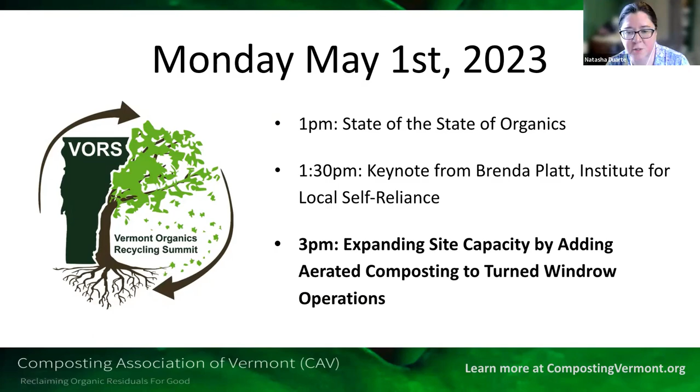With that, I'm going to stop sharing my screen and invite Brian Jerose to start sharing his screen while I introduce our speakers. We're joined today by Brian Jerose, who's been president of Agrilab Technologies, Inc. since 2012. AGT sells compost, aeration, and heat recovery units and other farm and composting equipment. Brian and his team also provide planning, design, development, implementation, and ongoing operating support to farm, municipal, commercial, and nonprofit clients in Vermont and several other states and countries. He's worked on a range of composting, watershed protection, and sustainable development projects, and he lives in Fairfield, Vermont.

Robert Spencer is going to be joining Brian. He's been the executive director of the Windham Solid Waste District since 2011. Windham Solid Waste Management District serves 19 member towns in southeastern Vermont and operates a transfer station, composting, recycling, household hazardous waste, and education programs on a Brattleboro property that includes a closed landfill covered by a solar array. Bob is also an environmental planning consultant who works with composting facilities and other clients in Massachusetts and around the country. He has operated several composting facilities and is also contributing editor for BioCycle, and he lives in Vernon, Vermont.

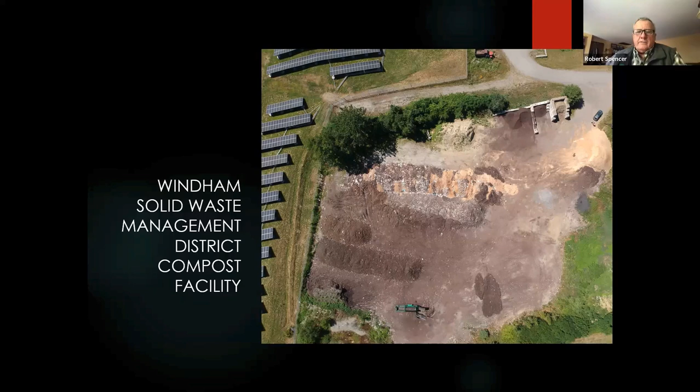Yes, we do have a significant demand for our product. We take mixed residential organics. This is from the town of Brattleboro.

For 10 years, they've offered curbside food scrap collection. The way the program operates is they have every other week trash collection, weekly food scraps, and weekly recycling.

They also have pay by the bag, or pay as you throw. So every other week collection increased the number of participants, and pay as you throw increases participation too. So we're up to over 600 tons per year of that mixture you see.

You can note the substantial amount of cardboard and paper products. We are about diversion as a solid waste authority.

We don't try to have certified organic compost, which would bounce a lot of these materials out. And we reduce the amount of carbon that we have to add due to the presence of the other fiber.

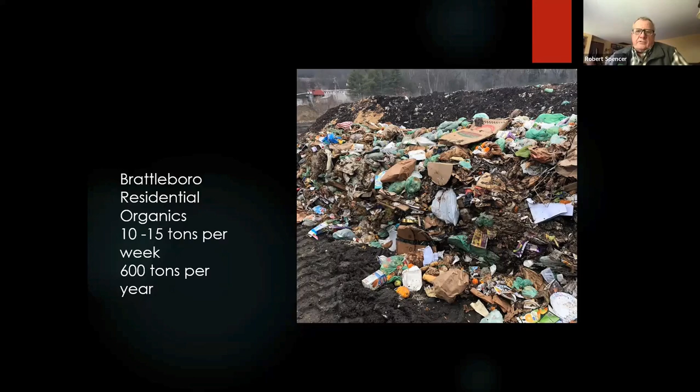The leaves that we get from the town of Brattleboro, there really aren't enough to sustain our carbon needs. There's only 2 collections curbside in Brattleboro, 2 weeks in the spring, 2 weeks in the fall.

So we have to go outside of the region to get more carbon, as I mentioned. Next, we have a number of commercial food manufacturing businesses that bring material to us.

One of them is a gluten-free bread company called Against the Grain, and they have been expanding exponentially over the last 5 years. And one of the ingredients in their mixture is eggs.

And they have a machine that extracts the contents of each egg to use in their recipes, and we get their eggshells.

Those are in biodegradable polymer bags, but we get literally millions of eggshells, and 2 compactor loads per week.

Occasionally we have off-spec bread and pizza shells, but I wanted to point out the eggshells because it's actually a slow release nutrient source for our compost.

And there's little white flakes in the finished product. And fortunately, it's predominantly not plastic.

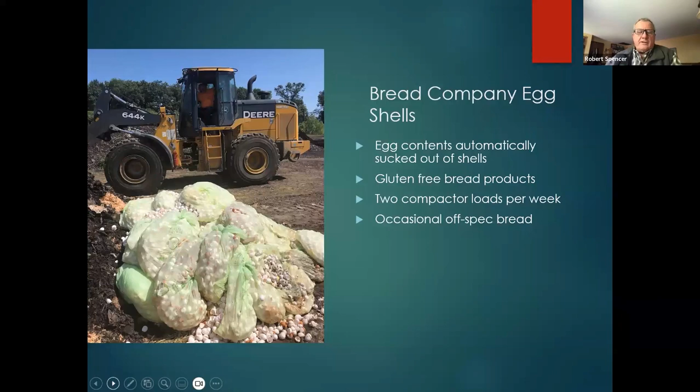Next. So this project is really centered around state regulations. And in Vermont, we have a very expedited program for starting as a small food waste composting facility.

Basically, it's a permit by rule, or registration process, where you can process up to 2,000 cubic yards per year of food waste, up to 3,000 cubic yards of yard waste. Total permitted capacity is 5,000 cubic yards.

We have a separate approval to take soiled paper and cardboard, which, as I mentioned, is a good carbon source. We have a very low-tech operation using turned windrows with a loader.

We have a large 5 cubic yard John Deere 644K that mixes the material and turns the piles. We have a smaller John Deere backhoe with a 1.5 cubic yard bucket that we use to load our trommel screen.

So we have really 3 pieces of equipment that we use primarily. We comply with the regulatory monitoring and document our pathogen kill temperatures as well as compost product testing.

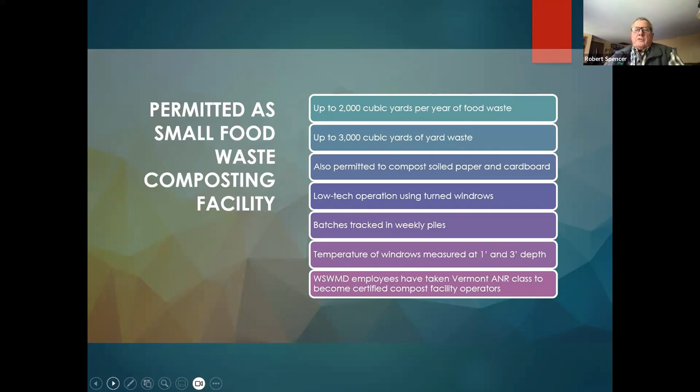And our employees have all been through the Vermont operator certification for compost facilities. Mentioned the Brattleboro curbside program.

It actually started in 2013, and as you can see, it's grown over the last several years, and we'll probably hit 700 tons this year.

We had a slight dip. We didn't accelerate as much in 2021, partly due to COVID, as was mentioned in the opening session, closures of schools, etc.

Called Vermont Bread Company. And that was a significant loss to our

feedstocks. We also proactively notified the Vermont DEC that we were exceeding our cubic yards.

The regulation is written in cubic yards. We weigh every vehicle, and so our records are in tons.

We spent, 2 years ago now, when we realized we were knocking on the door of our permit, a couple of months documenting every load that came in and estimating the percentage that was paper and cardboard versus food scraps.

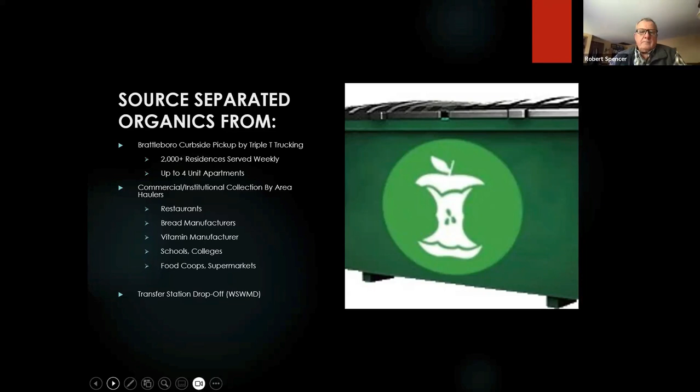Apartments above 4 units are considered commercial generators and are not served by the town of Brattleboro's program. Brattleboro operates the curbside collection with a private company, Triple T Trucking, which is now Casella Waste as of last month. In addition to the residential program, we have numerous restaurants, the bread manufacturers I mentioned, a vitamin manufacturer, schools, colleges, and supermarkets, food co-ops. Our transfer station also has a drop-off for residential food scraps, and several other transfer stations in our district send materials to our facility. So it's a wide range of institutional, commercial, and residential materials.

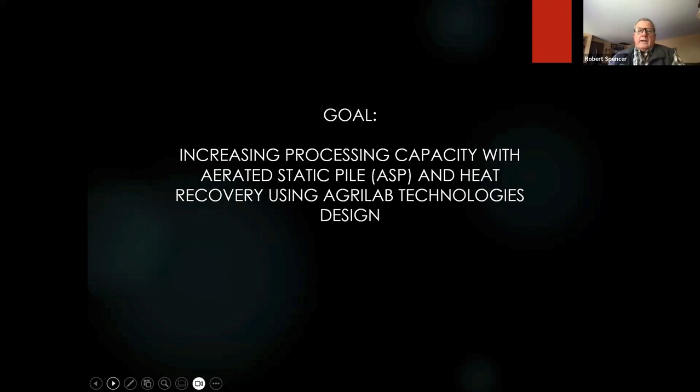Our overall goal is to increase capacity. We're hoping to do it, though we haven't built it yet, with aerated static pile and also heat recovery, which you'll hear more about. We needed some sort of accelerated process because of a relatively small footprint that I showed at the beginning—approximately 2.5 acres of active land use area for composting. It's on a 35-acre site the district owns, but 25 of that is closed landfill.

We also have a transfer station and a closed MRF building still used to bale cardboard, so the facility is quite busy. We needed a faster cycle time from when materials come in until they go out—it's anywhere from 6 months to a year right now, and we need to decrease that time to increase our throughput. We also wanted to use the aeration system in conjunction with turned windrow, and we'll show you how that design is set up, plus heat recovery. We needed a reasonable budget, which I'll talk about along with the financing, all while staying in compliance with Vermont ANR regulations.

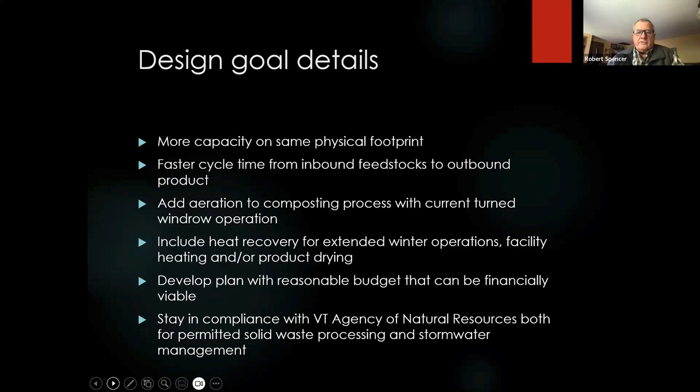So Brian, why don't you describe the system we're anticipating using? Just so everyone knows, we will be putting this project out to bid, and we have not selected Agrilab, but they have been part of our initial design. We retained them for initial design services, and they will be bidding on the project, though we're not sure how many other companies might bid—there are a couple others.

So just a quick review of what compost aeration and heat recovery is. Most folks are familiar with turned windrows, where loaders or other equipment flip and agitate the piles, both to mix the different feedstocks and particles and to get oxygen in. Forced aeration, or aerated static piles, involves setting up piping networks in or below the compost piles to push or pull more oxygen into the material. Since it's an aerobic process that wants oxygen to speed it up, rather than the 1 or 2 times a week that a typical turned windrow gets oxygen through turning, an aeration system can introduce oxygen 10 or 12 times a day, depending on the timer schedule.

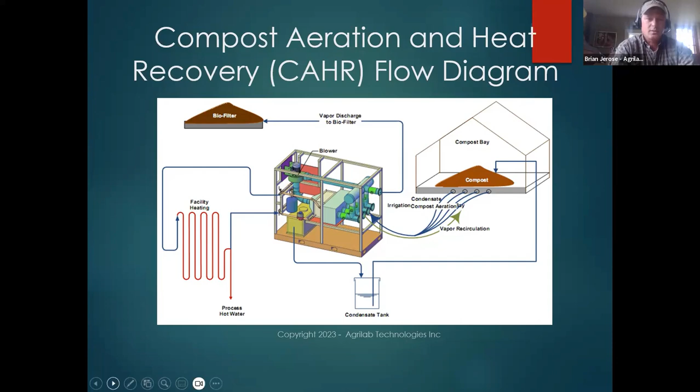We've, over the last few years, built up a good list of projects where we've implemented this compost aeration and heat recovery process. Right next to Brattleboro is a livestock and dairy farm in Vermont that Jeff Dunkley and family operate. They have a pretty simple unit that more or less sucks the tailpipe exhaust out of a rotary drum composter that they use with separated dairy manure solids.

Larger installations in hybrid farm and commercial situations include Foster Brothers Farms, the Vermont Natural Ag Products folks who make Moodoo—some of the shots I'll show later are from that site—Tamarlane Farm up in Lyndon, which some folks mentioned, and then several others around New England and all the way out to Michigan. Bob's had the benefit of being able to see at least a couple of these sites, 3 of them I believe, so that informed his team's decision to pursue this type of approach for their facility.

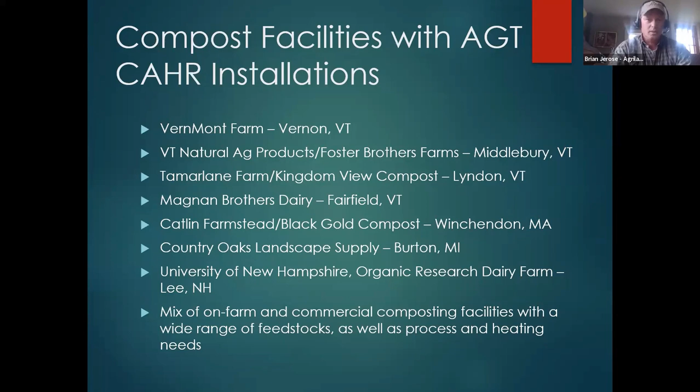This process isn't limited to dairy and livestock farms, even though our first sites were. We've been able to work with a wide range of feedstocks. The Vermont Natural Ag Products, for example, in Middlebury probably takes in a dozen different types of feedstocks. And some of the other commercial sites out in Michigan are primarily leaves and wood chips, food scraps, and such. So this technology works with a range of compost inputs and is adapted to what the site actually needs.

These next few slides are focused on just helping people visualize how these systems are actually put together. So these first few shots are kind of the construction stage, and then a couple shots that will end with what it looks like when it's operating.

To point out, some of the early heat recovery projects off of composting involve physically putting irrigation or other tubing in a compost pile. While that was a great innovative way to take advantage of it, known as the Jean Pain method, it can work well for a homestead or do-it-yourself operation. It's not very practical in a commercial or larger scale operation to have all that piping or tubing in your compost, and it's not even the most effective way to gather the energy.

So these systems involve setting up either the pipes on grade under the piles, or you can build trenches. This is pretty similar to what's proposed at the Windham site.

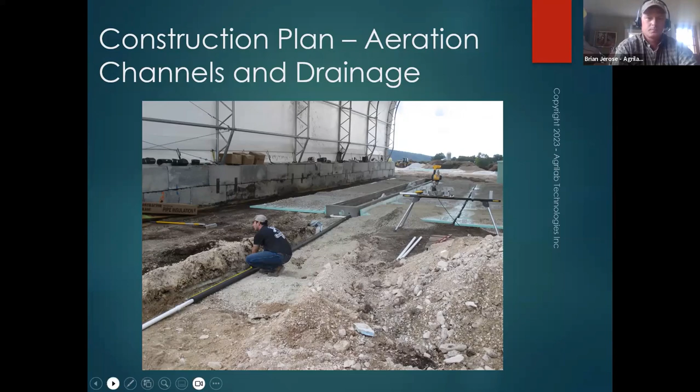Looking out on the pad, I wanted to call out that because we're also trying to do heat recovery beyond just putting these trenches into the working pad where we'll pull and push the aeration, it also maintains the temperatures to the best of our ability. So when that vapor is drawn into the heat exchange unit, it's at the highest temperature possible.

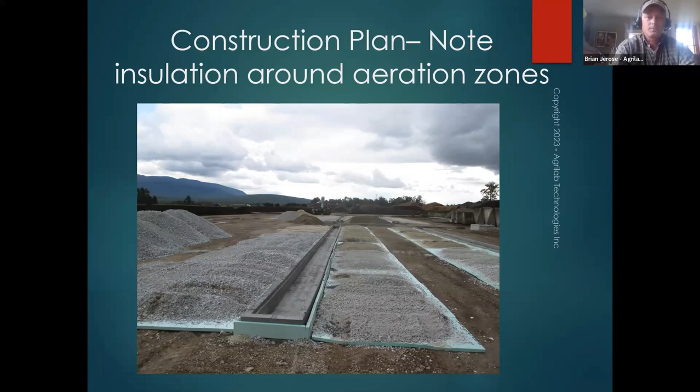One of the other things that happens with negative aeration, and is less of a concern with positive aeration, is the accumulation of condensate. Picture 150 degree vapor, high humidity. Anytime that vapor hits a cooler surface, like a pipe wall or any point along the path, it starts condensing and phase changing into liquid. If you don't have a good means to drain that out, you can create a blockage and interfere with effective aeration. So over time we developed different sump systems.

In this case, here's a septic style tank where the pipes go in. There's an extended trap, kind of a bigger version of what you see under your sink, and that allows the water to drain out without the suction of the fans pulling it from the compost pile instead. Interestingly, most of the water we see is condensate, not leachate. There's occasionally the rare circumstance where there's so much moisture going through the pile that you do have nutrients that need to be treated.

But oftentimes the mass of compost, even in an outdoor pad, is enough to absorb snow and rain melt. We do have this set up so that if you do have leachate, it's properly handled and sent to either a retention pond or an appropriate filtration area.

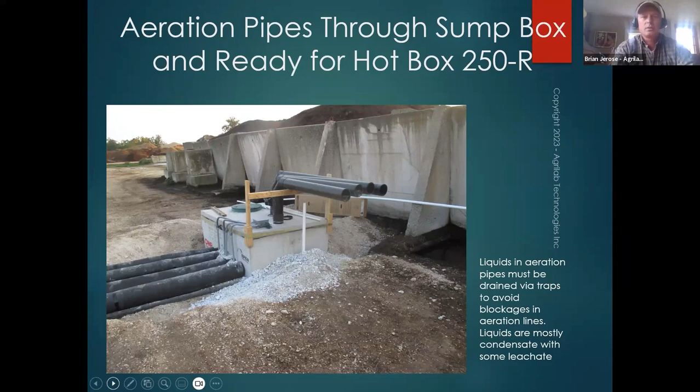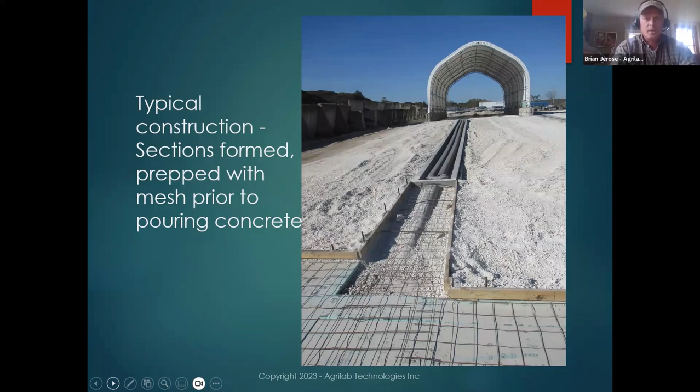A little more of a view of a pad coming together. You can see the sub-base material, the trench being filled up to it, and then in certain areas where it's more shallow to the surface, you want to protect the pipes, so concrete may be placed over those sections.

You can see the material being brought up to grade. Over to the left is the compost aeration and heat recovery unit, so all the mechanical equipment, the blowers, heat exchanger, sensors, etc. are in there. That's where the pipes connect from under the piles, run underground, go through the sump, and those circles are the pipe ports where it's connected. We build this equipment up in our shop in Cambridge, Vermont, off of Route 15, Lamoille County, and then deliver these to various sites as much of a plug and play equipment as possible.

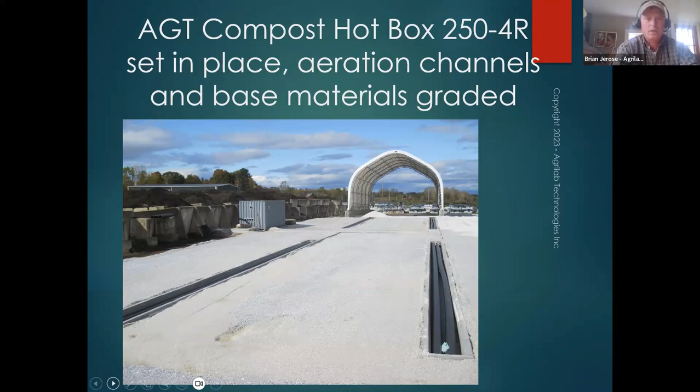Here we've got the final surface, in this case asphalt. I'd say the majority of sites use concrete or gravel as a surface, but in this case asphalt was most cost effective and has held up well. This pad has been in place since 2017 and is not showing any excessive wear or degradation.

One interesting thing I'll also call out is there are certainly a lot of systems, and we've made them as well, with cover plates, but as long as your process allows equipment to straddle and go in and out, placing these coarse, clean wood chips around the pipes has been an effective way to build a plenum and avoid clogging. By coarse, clean wood chips, I mean not a lot of fines or sawdust, so it's kind of loose, but still enough of an effective filter.

So wet manure or other wet compost particles are captured there and don't clog up the perforations in the pipe. Periodically it needs to be checked - you can have it get compacted or plugged at times and it needs to be raked off. Since it's wood chips, they will break down over time, but it seems to be 3 to 5 years for a full swap out. Those chips just go back into the process, so nothing's wasted, which is the goal.

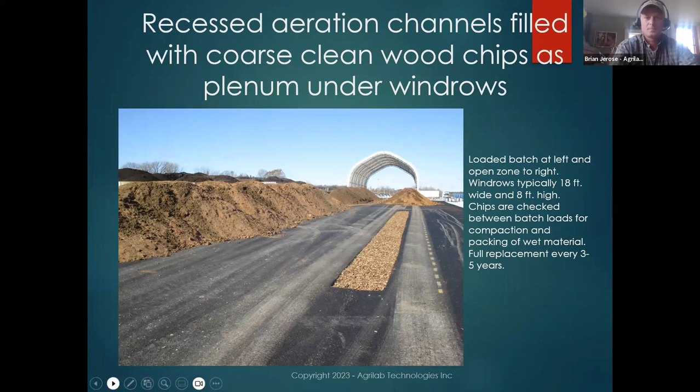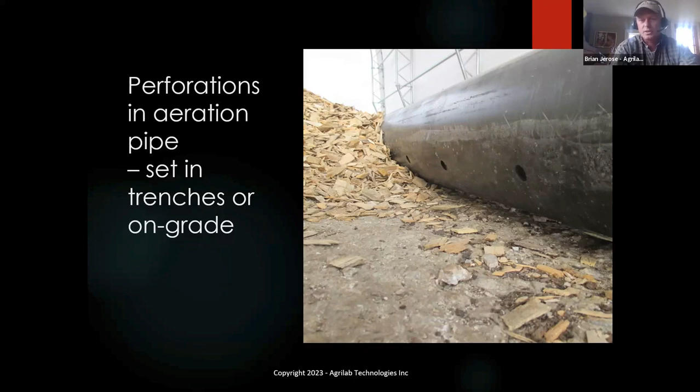Just a close-up look at the pipes. These are HDPE, high density polyethylene. They're much more durable than PVC, which we used on earlier projects and is appropriate in some settings for small scale systems, but these are durable and can hold up to impacts and resist crushing. I'm still amazed today that these perforations, in this case probably spaced a foot apart, 3/4 inch holes, are enough to pull enough air to effectively aerate and get oxygen into the piles, but also bring all that hot vapor into the equipment and do the heat recovery. In this case, the pipes will be set into trenches, as the design plan for Windham.

Another look at the site once in operation. What I like calling out here is, again, we're operating in the negative aeration mode the vast majority of the time, but you can see the active piles here on the right above those different aeration trenches.

And you can picture the vapor being drawn down, and it goes into pipes underground, goes over to the sump at the left, goes into the container where the blower, the heat exchanger, the valve controls are. And then at the very end, you can see a little bit of steam coming out of the exhaust.

If you're in recirculation mode, that exhaust would get pushed back into a pile that was cold or dry, or could otherwise benefit from the heat. If you're at an urban setting or commercial setting, and Brattleboro being the case, this vapor can be directed into a wood chip biofilter as an extra measure for odor mitigation.

First strategies are always recipe management, having enough carbon in the mixture, making sure there's adequate oxygen. So the biofilter is what we would call a multi-barrier approach, and that's worked well at other settings where we've had installations.

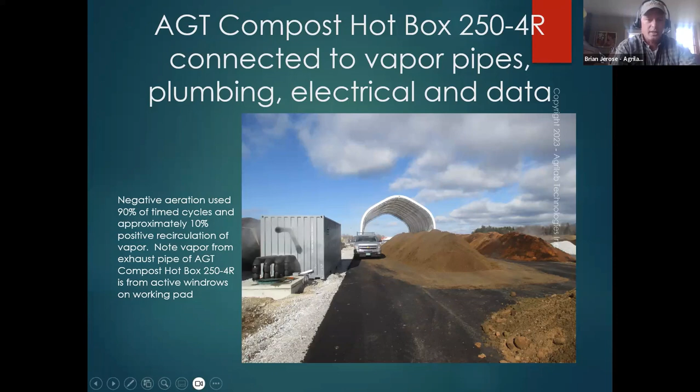Here's our lead engineer, Vice President Jason McCune-Sanders, with one of our units. We've either put one or two of these arrays inside of a 20-foot shipping container, or can have them on a smaller skid frame. But again, this is what's inside of those containers, where the pipe ports are on the back wall. The pipes come in, a controlled series of valves and gates can isolate which pipe and which windrow is being aerated.

This is the heat exchanger here, which is like a specialized radiator heat exchanger that's corrosion resistant. Connects into piping where we can direct the hot water and glycol mix. This green and yellow equipment is, in this case, a 3 horsepower blower.

This is being assembled at our shop, so we usually don't leave them disconnected once we're on a site. But this is where the blower would put that suction on those piles that could be anywhere from 150 to 300 cubic yards of material, and effectively pull the vapor through.

And then again, the pipe can either head out to exhaust or be redirected through a second plenum and series of controlled valves to recirculate into a batch.

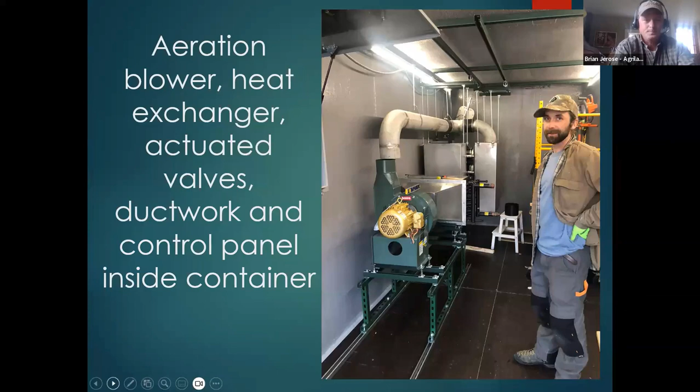All right, then the fun part — we got into planning after looking at existing maps and aerial imagery. Jason and team pulled together some new maps that we brought down to the site, and this is back in 2021, and did some on-site checking.

So we've got some ideas on paper, and then we go out there with the 200-foot tape measure and take a bunch of notes on the pad, talking about everything from equipment flow to trucks coming into the site, to the slope and the pitch and the runoff, how materials will be transferred from one phase to the other. So all those things we can kind of ground truth and check.

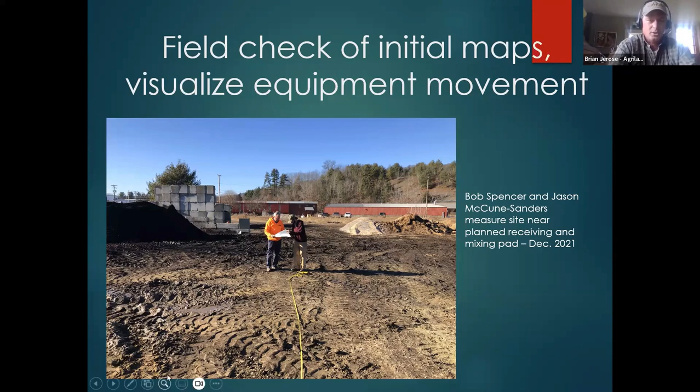This area, for example, is probably where the aeration facility, the equipment, and the biofilter will be located, on the south to southeast corner of the site. So this is the district property and the neighboring wood processing facility across Ferry Road, Old Ferry Road.

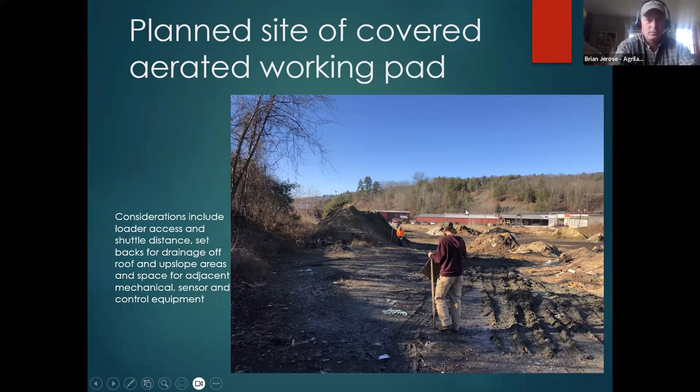So then the process of planning and design goes from more generalized drawings of overlays covering the baseline conditions and initial proposal, and then it's an iterative process, meaning we go back and forth. So it's talking through what are some of the efficiencies or shortcomings of these different layouts, and then also at the same time getting into a budgeting exercise.

So obviously things like the building are a huge expense. If the building needs to be bigger, that's going to add tens of thousands of dollars to the whole capital cost. How can we minimize the covered area? How does this tie in with compliance?

Bob mentioned one of the big drivers for this whole endeavor was to remain in compliance with Vermont DEC solid waste and stormwater rules. Well, since the site is so relatively small, there's not an effective space or a cost-effective way to put in a detention pond. So how do you reduce the risk of leachate?

Well, cover your raw materials that go in. So just a quick narration, and we'll keep revisiting this — trucks would come in, tip their loads at this front end of the site, a receiving and blending area, and then the windrows will get placed in this covered structure for the first aeration phase, achieving the process to further reduce pathogens per the time and temperature requirements, before then being moved out to turned windrows, more like the process that already exists now. But the material will be significantly more stabilized going into the windrows than it is by the exclusively turned windrow process.

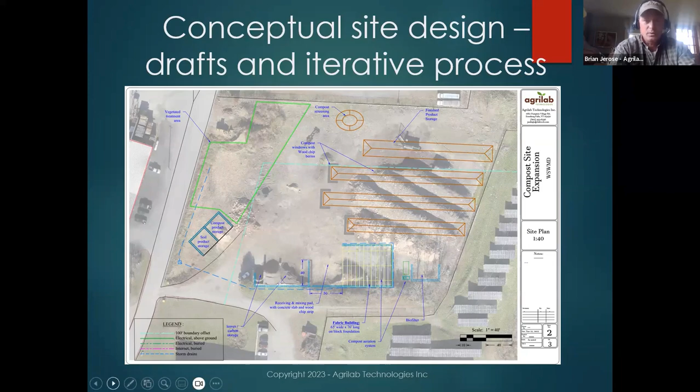A couple other views just to help ourselves, partners and regulators visualize what's being planned here.

This was a later stage of the design, and for the most part it's still the same. At one point the orientation of the building changed, and the mechanicals are put into the southeast corner of the site.

This big green area in the front is the vegetative treatment area, and these horseshoe or staple-like structures are compost filter berms to be placed around the end of the windrows. These were measures taken to minimize the potential for any sediment or nutrients to reach off-site or nearby surface waters.

The idea with the pitch of the site sloping generally from east to west is we do our best to contain anything from the tipping and receiving area with a wood chip berm, and likewise during the windrows phase. Anything that does come off the driveways or around the pads has a vegetative treatment area to also reduce that potential for sediment and nutrient loss.

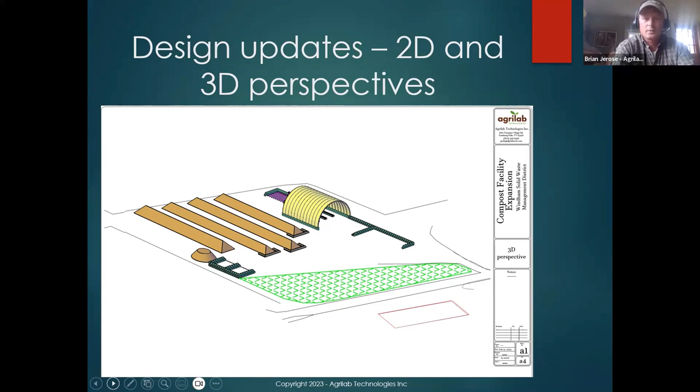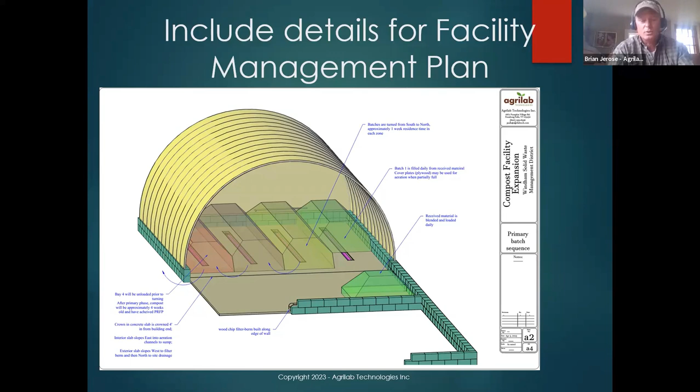A little detail on where the aeration trenches are embedded into the working pad, a view out front of where the wood chip filter berm would be around the tipping and mixing area, and how the received materials are blended and loaded daily. So a little more detail, both to help the project team as well as regulators look at the approach.

Sanborn Head is the engineering firm, a licensed engineering firm, primarily looking at stormwater, but they're also doing the kind of master plans for the site development and stormwater.

A little more detail than you can see here. I won't try to expect anyone to read it, but this is what would go in the actual permit application, and it covers all of those details of where things are located, their setbacks.

In the case of this application, because of the site size, some variances had to be requested. Those had to be well documented, both for what they are specifically, justifications, and what extra measures are being taken, such as the berms and the filter area, to accommodate that request.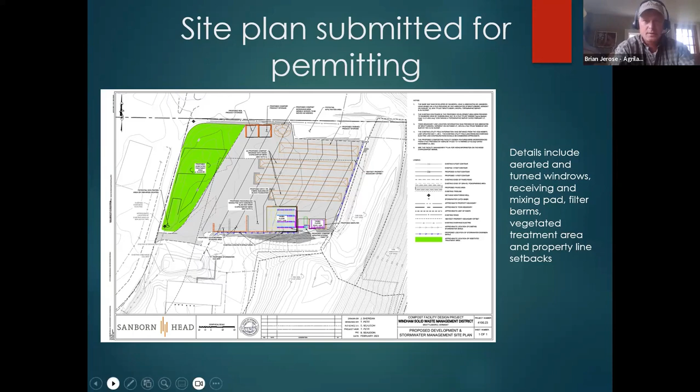Bob, you can jump back in at any point here, but the process that Bob and I really wanted to share in this presentation is, while it's painfully long to go through all of this and get the funding and go through all the sequence, I think we're both very complimentary of the guidance and feedback we got from the DEC staff, Ben Gauthier in particular, Dennis Feckert, and then working with Bob's team, John Fay and Jason Kuhn-Sanders on Agrilab. Not that they told us exactly what to do, but we were able to share different drafts at points in the process and review their questions.

In many cases it was just a matter of us clarifying, but in other cases we had to go back and sharpen our pencils and make sure we were following the guidance and actually comply with the requirements that are a bit more stringent for a medium facility versus what the district currently has. But Bob, go ahead and add in here — you covered that nicely, Brian.

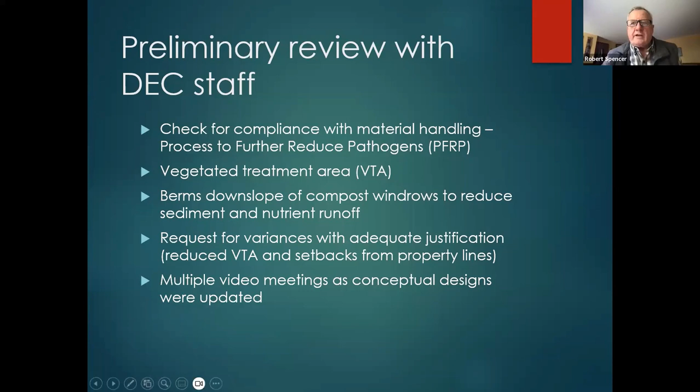One of the drivers of the building enclosure is leachate management. Under the DEC compost regulations, for a medium food waste facility, which I described, you have to collect and treat leachate or prevent it from occurring through an enclosure, like in a building.

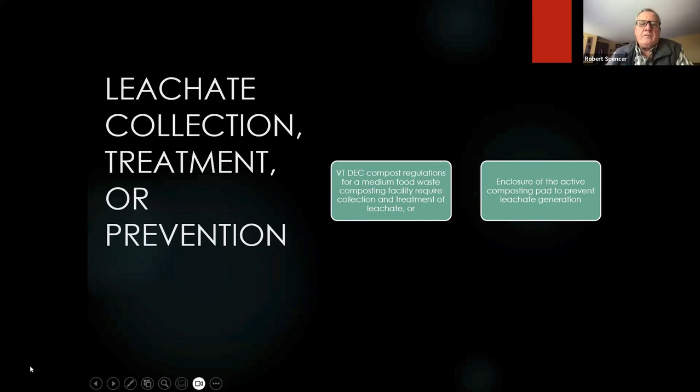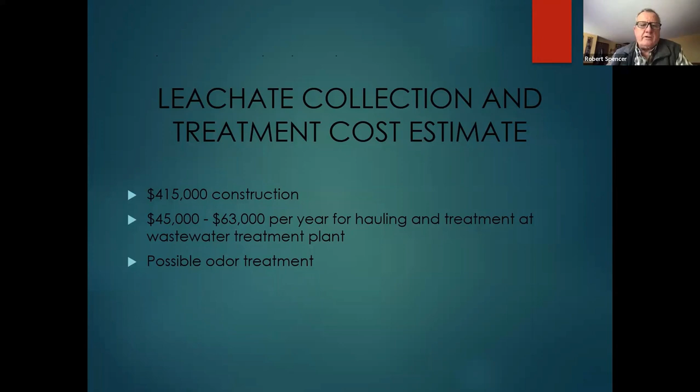What we opted for — we had an engineering evaluation of the cost to collect leachate, build retention ponds, and pump them out. We don't really have much need for reusing runoff water in the facility; moisture is sort of our enemy. So hauling it to the town of Brattleboro wastewater treatment plant could be very expensive. So this is where we're at now.

We are at a budget of approximately $700,000. Again, we want to continue the current operation and integrate that into the construction phase. We're planning to put a total new gravel pad on that dirt area you saw in the photographs. We would use a fabric building, much like many towns use for salt storage or equipment storage. They're basically temporary buildings on concrete blocks.

We would put a concrete slab, as Brian described, with aeration trenches. It allows us to capture the heat, which is important for process acceleration as well as potentially drying product. I sure wish I had that this month because we've had so much rain, we're having trouble keeping up with our screening.

We're adding the extra biofilter for odor treatment, although we've had no odor problems at our site. The new capacity would double what we currently are allowed in terms of cubic yards of food scraps. The permit is quite generous, with up to 40,000 cubic yards of organics, but we doubt we'll get much above 10,000 cubic yards due to the small size of the site.

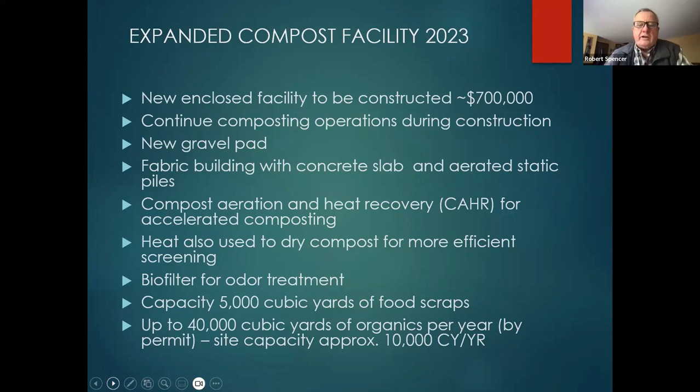So next. Again, how do you pay for such a thing? My board is comprised of 19 rural towns that are very adverse to any long-term debt. Our district is controlled by 19 towns, and they will not accept any long-term debt. So they said, figure out how to finance this, Bob. And that's really been a challenge.

But the board stepped up big time last December and said, we'll put $225,000 down. They actually appropriated it and set it aside, which was a significant move on my board's part. The USDA Community Facilities Grant Program has awarded us $150,000, but it's a very, very arduous application process, and I'm still not completely done with that. But I'd do it again if I had to.

Vermont DEC, the Agency of Natural Resources, that was in the Deputy Commissioner's presentation. We were one of the two sites that's received a couple of these grants, but we just were awarded this spring $277,000, which is calculated on 40% of the project cost.

And then we have a long shot at a US EPA solid waste infrastructure grant, which we put in for $1.2 million, and it would be an increased cost where we would pave the entire site and also install a mixer for blending feedstocks. That quickly pushes us up above the $700,000 we now anticipate.

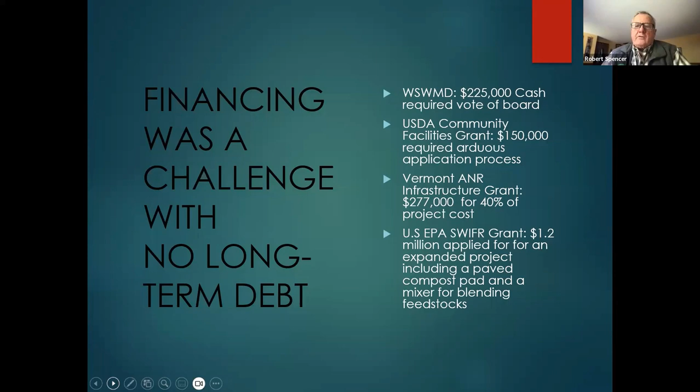Permitting has been interesting. We started out this recent December, filed a permit application for the facility, and then the DEC staff said, hey Bob, your 10-year permit for your whole facility is up next March, let's roll this application into that. Again, another example, in my opinion, of DEC working with us to expedite this. So the DEC permit for the recertification of our entire facility, which includes household hazardous waste collection, transfer station, baling, cardboard, multiple solid waste functions, is now in a draft phase and up for 30-day public comment.

The town of Brattleboro in December awarded us a zoning permit. Because we're adding a new building, the town zoning district that we're in actually allows for composting. It's an industrial zone, so that wasn't a question of whether we needed a special permit. Then our stormwater permitting is well underway, we have a few more details to get that in place. And then in Vermont, there's a statewide Act 250 permit, and we have to amend that to include this facility. Next.

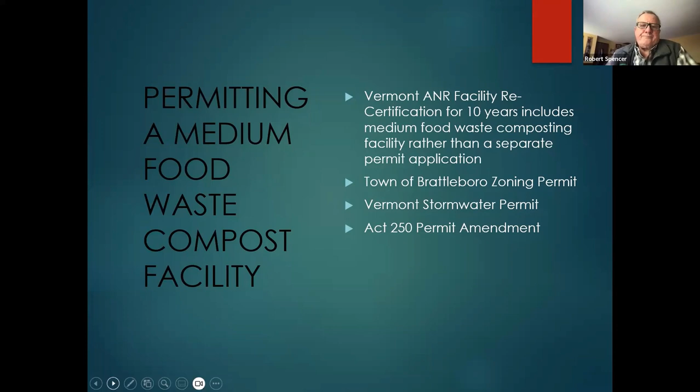So we're going to wrap this up here. I think we're on time. We need to prepare RFPs. USDA requires it, our own solid waste district purchasing policy requires it, so we'll be doing RFPs for various components. We want to do those in the next couple of months and select contractors so that this project could be implemented relatively before the end of the year.

The stormwater management, as I said, is underway. This week we're going to have some test pits dug and confirm soil infiltration. We've retained a local construction management firm, Steve Horton, to work with Sanborn Head on our bidding and overall project construction management. We keep updating our budget projections, it has obviously gone up. Then we'll select a general contractor and hopefully start construction this fall and get it up and running by the end of the year.

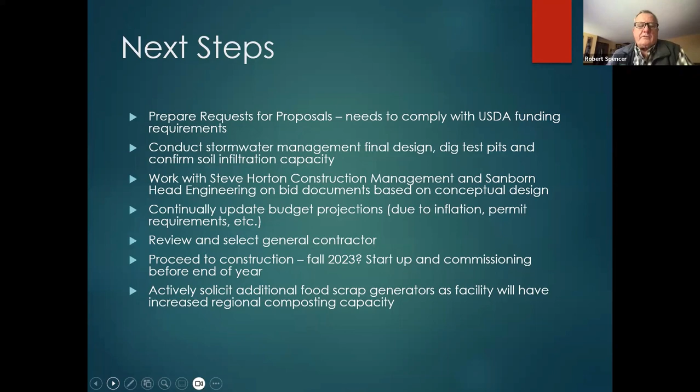We're then going to be able to actively solicit additional food scrap generators. We put that on hold as the facility permits were being exceeded, and we have various generators that are anxious to direct their materials to us. Next, I think that's it, and I'd be glad to turn it over to Natasha.

Yeah, thanks, we do have some questions that came in from chat. One asks, when pulling air negatively, does that air have less oxygen in it? And how does it affect forcing the warm air into a fresher pile? Do you need to force more than enough to compensate for less oxygenated air? Great question, and I'll take that one.

Fortunately, one of the things we have are sensors on the ductwork where we're drawing the piles. In a 30-minute aeration cycle from a compost pile, if it's a fresh active pile, you may see very low oxygen levels, down to 1% even. That pile may have been sitting dormant for at least a couple hours in an aerated system, or several days in a turned windrow system, and oxygen may still be available to the outer layer 12 inches deep. But that's why the process slows down. The core of the pile, where all the active biology is consuming oxygen, sees the rate of decomposition slow down or start to go into a slower anaerobic phase.

So you can actually see over a 30-minute aeration cycle that oxygen levels will go up. Historical research has said that 5% is kind of the minimum to hit aerobic conditions in a pile, and 15% is optimal. We tend to shoot for 10% with an early pile. So we track that, and we wouldn't put on recirculation to another pile until we're hitting something like 10% oxygen, because if we pushed oxygen-starved air into a fresh batch, that doesn't help it get started. We monitor oxygen levels and set the timer so it goes into recirculation mode once it's at sufficient oxygen and temperature levels.